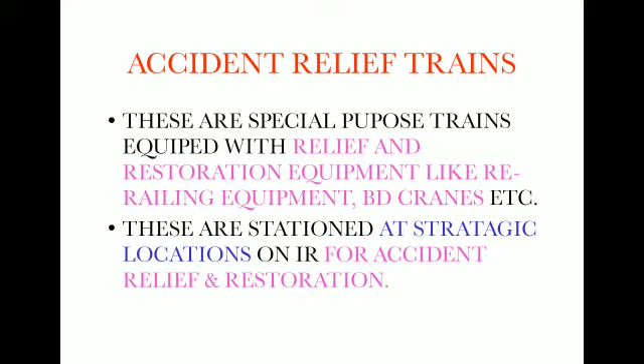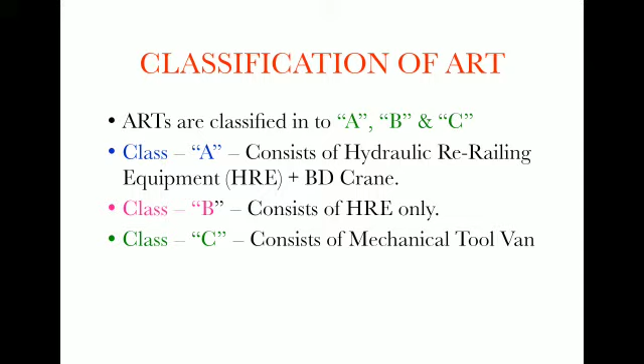Classification of ART. ARTs are classified into A, B and C. Class A consists of hydraulic re-railing equipment HRE plus BD crane. Class B consists of HRE only. Class C consists of mechanical tool van.

BG A class ARTs on SCR. Locations and type of equipment. SC: Lukas HRE plus Cowans new 140T crane. Kazipet: Lukas HRE, Cowans old 140T crane. BZA: Lukas HRE in SPART plus Cowans old 140T crane.

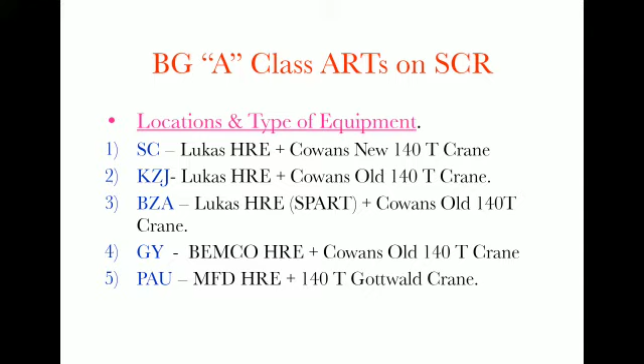GY: Bemco HRE plus Cowans old 140T crane. PAU: MFD HRE plus 140T Gottwald crane. BG B class ARTs on SCR. SC: MFD HRE in SPART. Kazipet: MFD HRE in SPART.

BPA Lukas HRE, RJY Lukas HRE, BTTR Lukas HRE, GTL Lukas HRE, RU Lukas HRE, DMM Bemco HRE, GNT Lukas HRE, NZB MFD HRE.

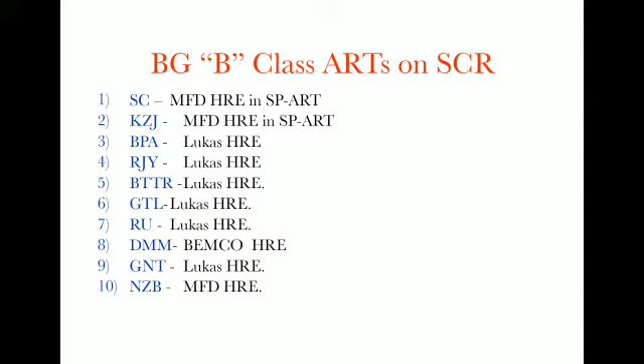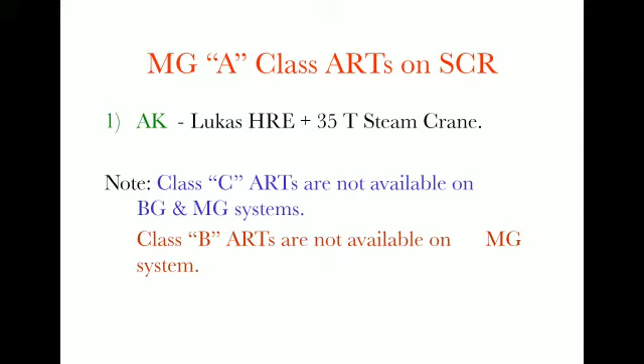MG A class ARTs on SCR. AK: Lukas HRE plus 35T steam crane. Class C ARTs are not available on BG and MG systems. Class B ARTs are not available on MG systems.

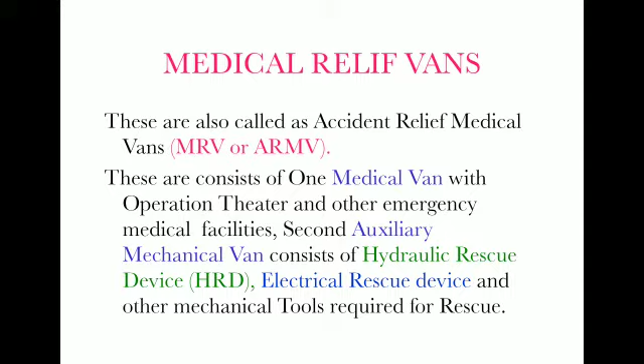Medical relief vans. These are also called accident relief medical vans, MRV or ARMV. These consist of, first, one medical van with operation theatre and other emergency medical facilities. Second, an auxiliary mechanical van consisting of hydraulic rescue device HRD, electrical rescue device and other mechanical tools required for rescue.

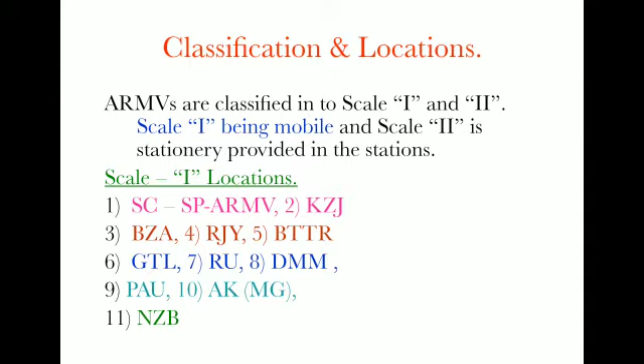Classification and locations. ARMVs are classified into Scale 1 and 2. Scale 1 being mobile and Scale 2 is stationary, provided in the stations. Scale 1 locations: SC, SP-ARMV, KZJ, BZA, RJY, BTTR, GTL, RU, DMM, PAU, AK, NZB.

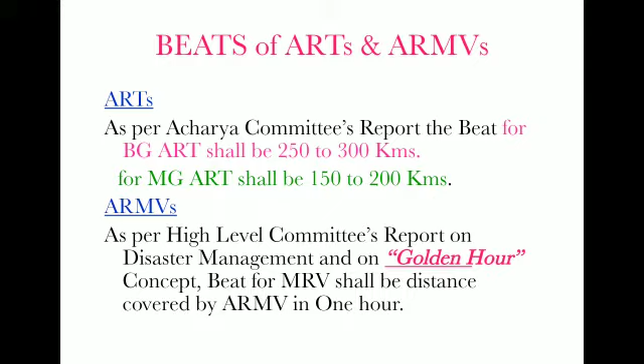Beats of ARTs and ARMVs. ARTs: as per Acharya committee's report, the beat for BG ART shall be 250 to 300 kilometers, for MG ART 150 to 200 kilometers. ARMVs: as per high level committee's report on disaster management and on golden hour concept, beat for MRV shall be distance covered by ARMV in 1 hour.

HREs. Types: Lukas, MFD, Bemco. First two are imported from Germany and Bemco is Indian make. Basic equipment and functions are the same in all types. Important items in HRE: number 1, hydraulic power pack; number 2, control stand; number 3, hydraulic jacks of different capacities; traversing unit, re-railing bridges, tilting jacks, hydraulic hoses, hand pump and other auxiliary tools.

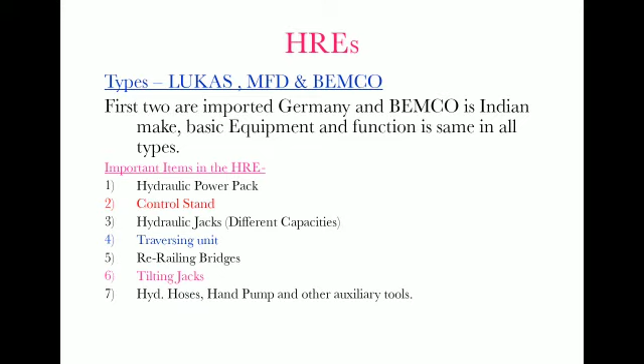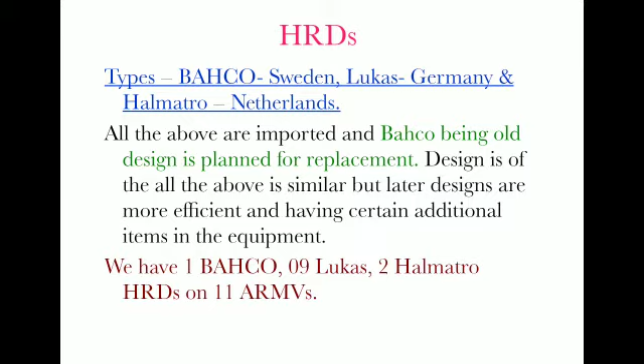HRDs types: BAHCO Sweden, Lukas Germany and Holmatro Netherlands. All the above are imported and BAHCO, being old design, is planned for replacement. Design of all the above is similar but later designs are more efficient and have certain additional items in the equipment. We have 1 BAHCO, 9 Lukas, 2 Holmatro HRDs on 11 ARMVs.

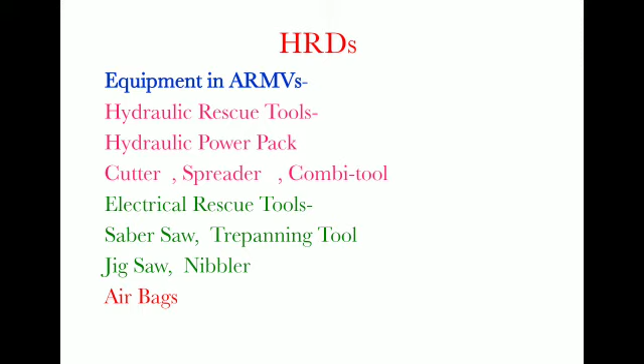HRD equipment in ARMVs: hydraulic rescue tools, hydraulic power pack, cutter, spreader, combi tool. Electrical rescue tools: saber saw, trepanning tool, jigsaw, nibbler, airbags. Types of BD cranes: 140T diesel hydraulic, 4 Cowans Sheldon old, 3 Jessop, 1 Cowans Sheldon new upgraded, 1 Gottwald; 35T steam coal-fired cranes MG, 1.

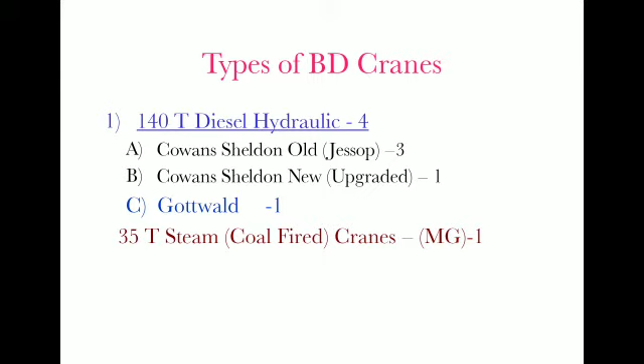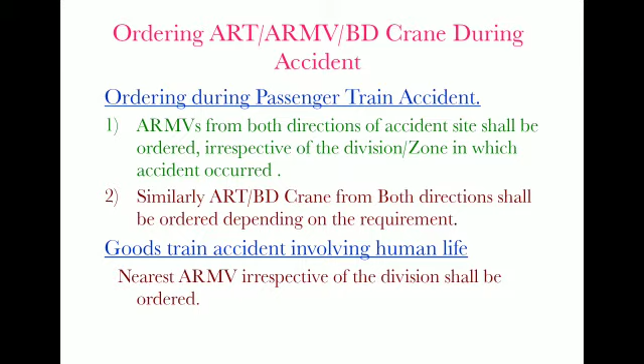Ordering ART, ARMV, BD crane during accident. Ordering during passenger train accident. Number 1: ARMVs from both directions of accident site shall be ordered, irrespective of division or zone in which accident occurred. Number 2: similarly, ART/BD crane from both directions shall be ordered depending on the requirement. Goods train accident involving human life: nearest ARMVs irrespective of division shall be ordered.

Goods train accidents continued. Accident affecting mainline running: ART from both directions shall be ordered. Depending on necessity, BD crane shall be ordered. As far as possible, ART/crane within the division shall be ordered without prejudice to ordering ARTs from other divisions and zones. Accidents not affecting through running of trains: ART/BD cranes of particular division shall be ordered.

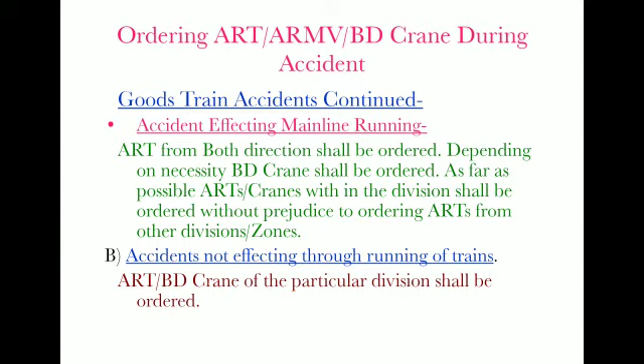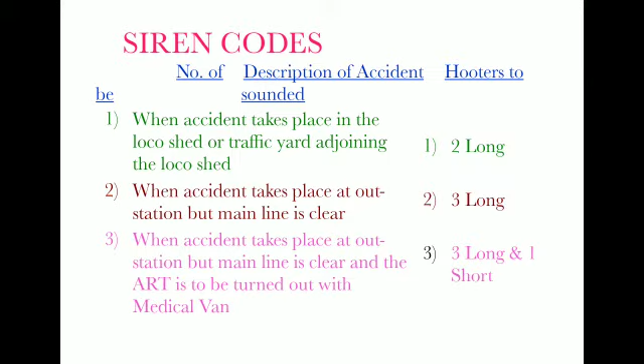Siren codes. Number 1: when accident takes place in the loco shed or traffic yard adjoining the loco shed. Two long: when accident takes place at outstation but main line is clear. Three long: when accident takes place at outstation but main line is clear, the ART is to be turned out with medical van.

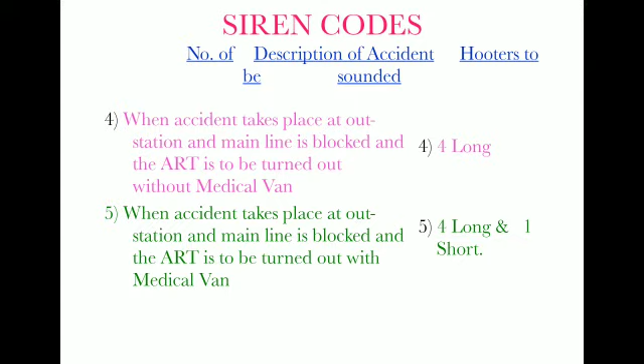Three long, one short: when accident takes place at outstation and main line is blocked and the ART is to be turned out without medical van. Four long: when accident takes place at outstation and main line is blocked and the ART is to be turned out with medical van. Four long, one short.

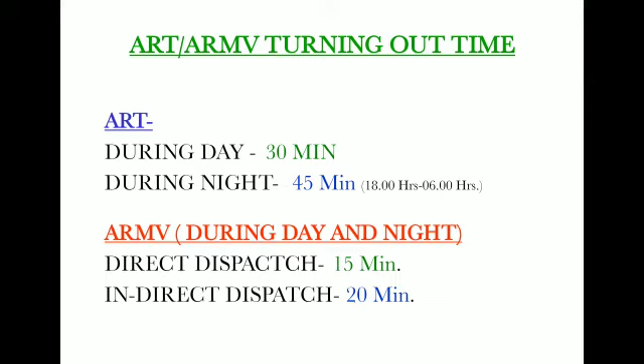ART/ARMV turning out time. ART during day 30 minutes, during night 45 minutes, that is 18 hours to 6 hours. ARMV during day and night: direct dispatch 15 minutes, indirect dispatch 20 minutes.

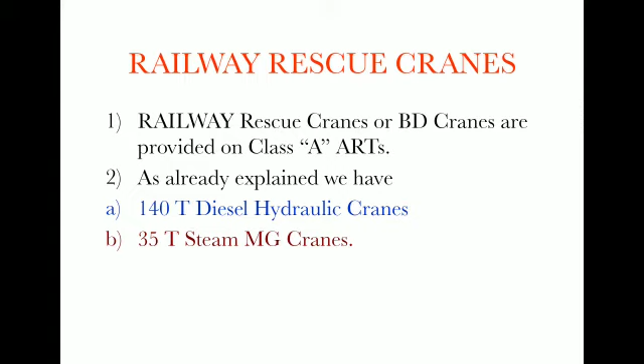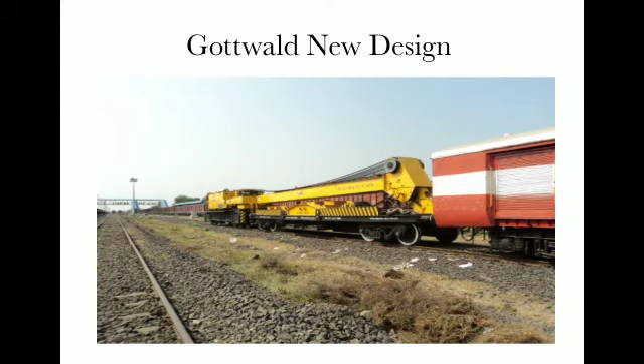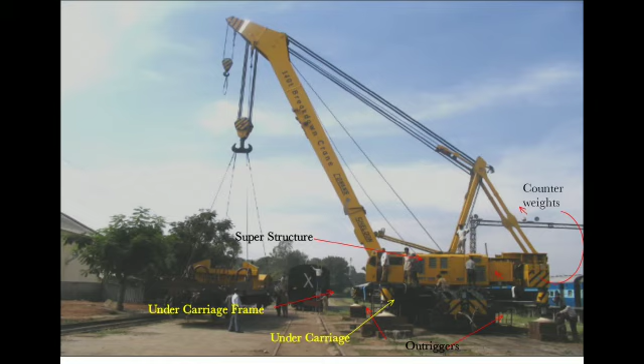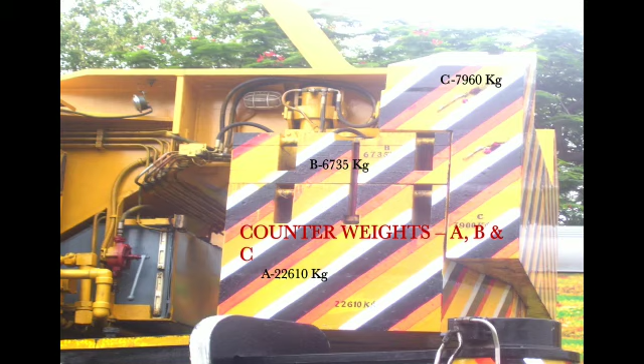This is different parts of crane: superstructure, undercarriage frame, undercarriage, counterweights. This is counterweights A, B and C. A 22,610 kgs, B 6,735 kgs, C 7,960 kgs.

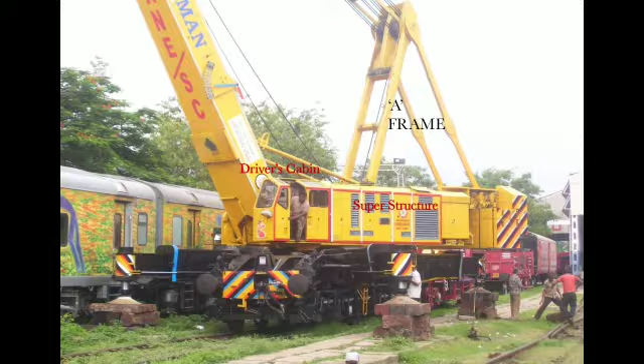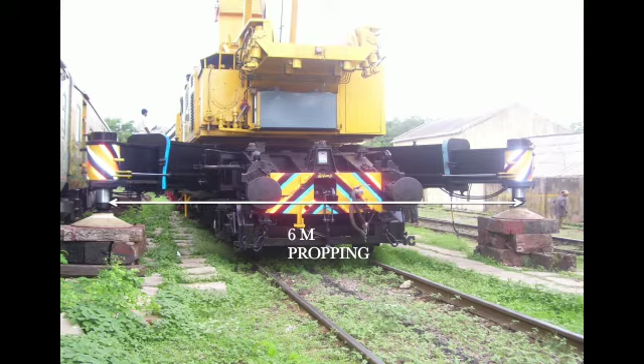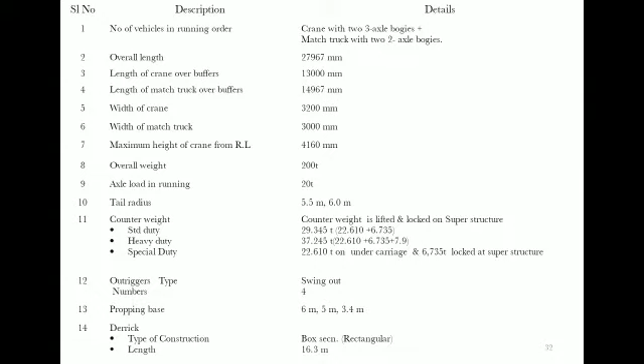Heavy duty 37.245 T, that is 22.610 plus 6.735 plus 7.9. Special duty, 22.610 T on undercarriage and 6.735 T locked at superstructure. Outriggers type swinging out, numbers 4. Propping base 6M, 5M, 3.4M. Derrick type of construction box section rectangular, length 16.3 m.

Suspension crane parabolic leaf springs, coil springs, leaf springs 6 numbers, dampers 4 numbers. Safe load indicator, Ascorel, France. Hooks, main 140T, auxiliary 25T. Hauling winch capacity 10T. Lifting beam capacity 2 numbers, 140T, 70T. Wheel diameter, crane and match truck: new one 915 mm, match truck 1000 mm; condemning crane 813 mm, match truck 906 mm.

Range of lift above rail level MH 13 m, AH 17.8 m; below rail level MH 4 m, AH 3 m. Indications available on SLI: working radius, lifted load at hook, maximum load, boom angle, boom head height, slewing angle, propping zone showing, percentage load condition, chassis gradient, super elevation, override, counterweight.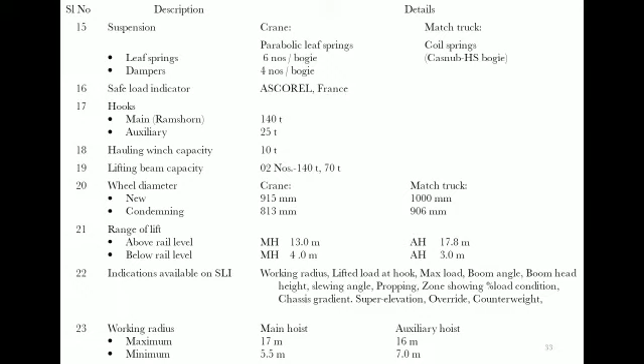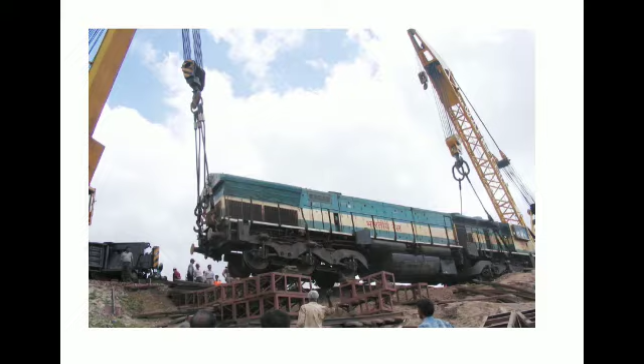Working radius maximum main hoist 17 m, auxiliary hoist 16 m, minimum 5.5 m, 7.0 auxiliary hoist. These are the images of cranes lifting loco. Old and new Gottwald cranes. Gottwald new design. Operation of 140T cranes.

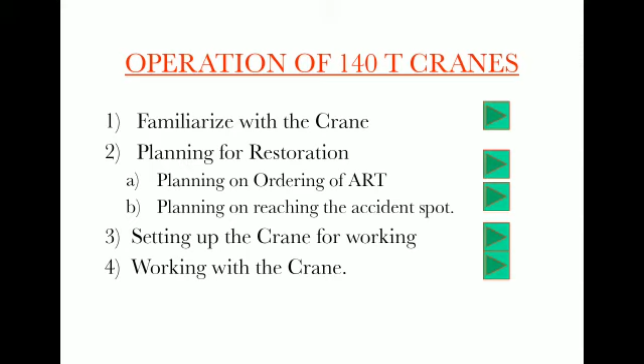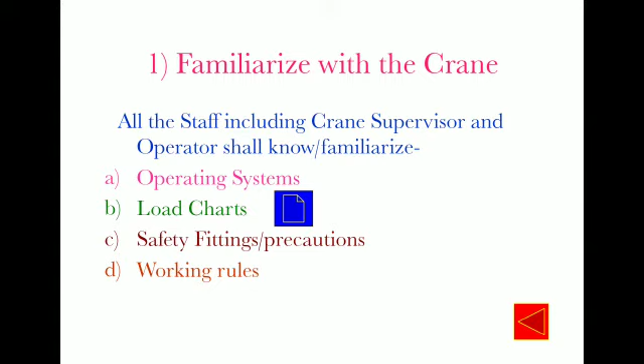Familiarize with crane. Planning for restoration. Planning on ordering of ART. Planning on reaching the accident spot. Setting up the crane for working. Familiarize with the crane: all the staff including crane supervisor and operator shall know, familiarize with operating systems, load charts, safety fittings, precautions, working rules. Planning on ordering of ART.

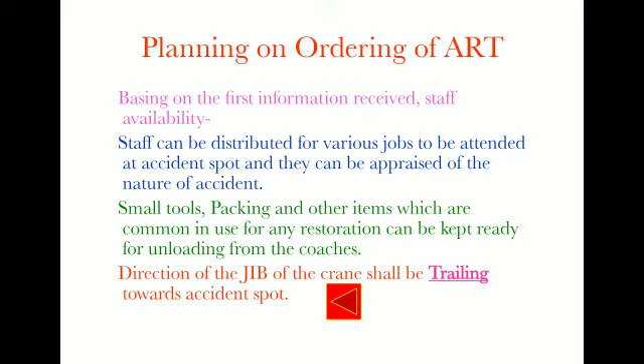Basing on the first information received and staff availability, staff can be distributed for various jobs to be attended at accident spot, and they can be apprised of the nature of accident. Small tools, packing and other items which are common in use for any restoration can be kept ready for unloading from the coaches. Direction of the jib of the crane shall be trailing towards accident spot.

Duties of senior most official travelling by train during accident. Ensure protection of traffic and assistance to guard and driver. Ensure the reporting of accident to nearest station and control. Note down the time of accident. Collect staff, volunteers, form them into different groups and assign work. Roughly assess the casualty and extent of damage.

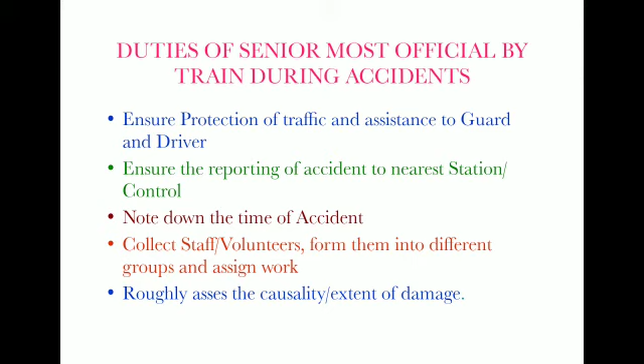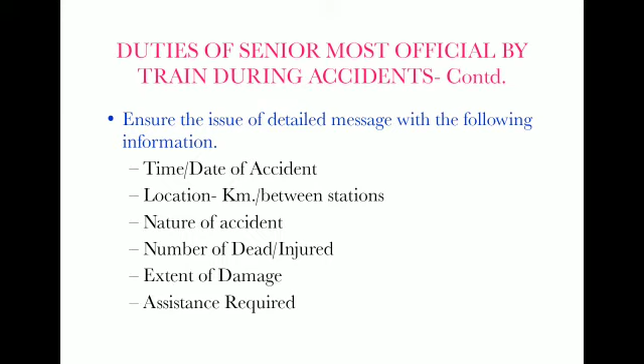Ensure the issue of detailed messages with the following information: time and date of accident, location, kilometer between stations, nature of accident, number of dead, injured, extent of damage, assistance required, primary cause of accident, condition of the adjoining line if any, whether OHE is involved. Maintain the log of events till the site manager takes over, continue to be in charge of the site.

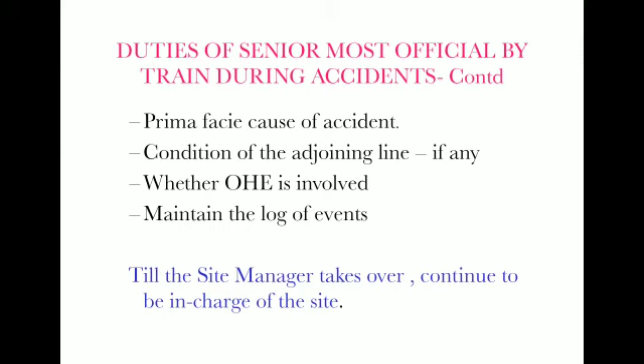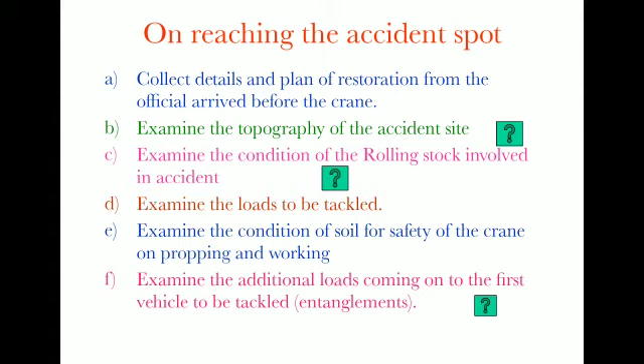On reaching the accident spot, collect the details and the plan of restoration from the official arrived before the crane. Examine the topography of the accident site. Examine the condition of the rolling stock involved in the accident. Examine the loads to be tackled. Examine the conditions of soil for safety of the crane on propping and working. Examine the additional loads coming onto the first vehicle to be tackled. Entanglements.

Examine the condition of undercarriage trolleys. Decide upon the restoration plan, that is whether to re-rail or ground. Decide upon the first vehicle to be tackled. Decide upon the slings to be used based on the loads to be tackled.

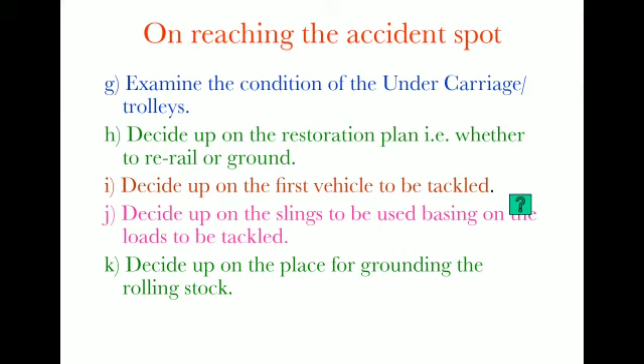Decide upon the place of grounding the rolling stock. Decide upon the correct place for propping the crane. Decide upon the slinging points on the rolling stock. Estimate the probable time of restoration, particularly from the mechanical department point. If necessary, ask for additional cranes.

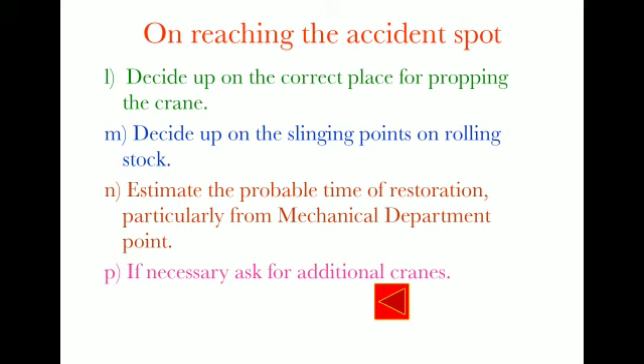Setting up the crane for working. A series of operations are required for initial setting up of the crane for actual restoration work. These are different for each type of crane. Staff nominated for this job shall know the sequence of operations. Carry out the operations which can be carried out simultaneously, thereby saving time in total restoration.

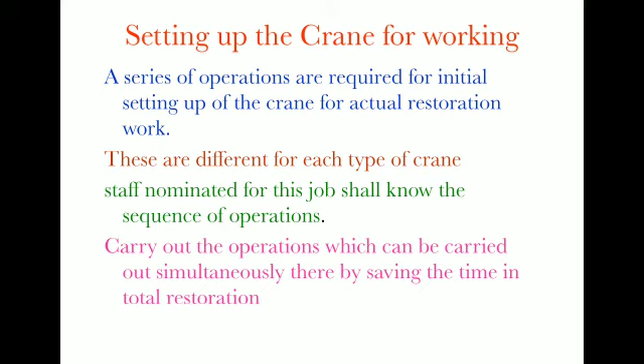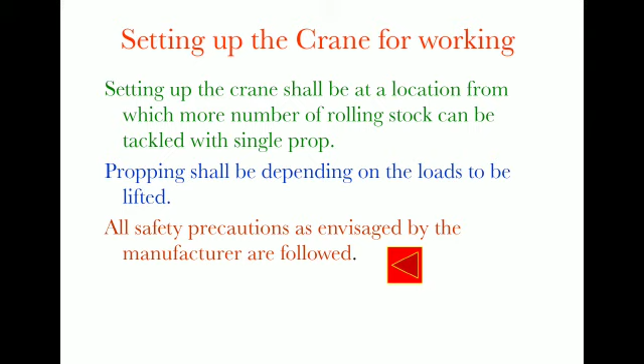Setting up the crane shall be at a location from which more rolling stock can be tackled with a single prop. Propping shall depend on the loads to be lifted. All safety precautions as instructed by the manufacturer are followed.

Working with the crane. When the crane is fully set up for tackling the load, staff nominated are in their positions, crane jib and crane slewed to the correct position. Slinging is done at the proper location depending on the condition and load of the rolling stock to be tackled. Alert all the staff of all the departments and all onlookers before actual lifting of the load.

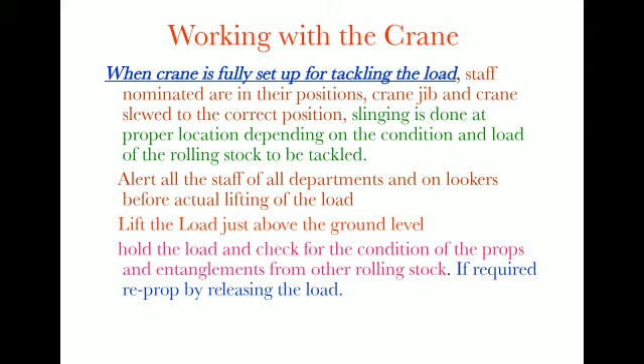Lift the load just above the ground level, hold the load and check for the condition of props and entanglements from other rolling stock. If required, re-prop by releasing the load. When lifted, also check the undercarriage condition. If required, release the trolleys.

Check the slew area is clear. Confirm adjoining running lines are blocked for train movement before slew. Lift the load to the minimum height required and slew the load to the place of grounding. Avoid jerk while slewing. Ground the load properly so that it is not fouling the running lines and shall not slip off from the ground later.

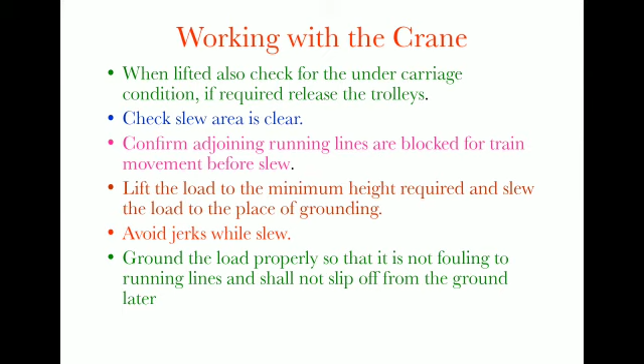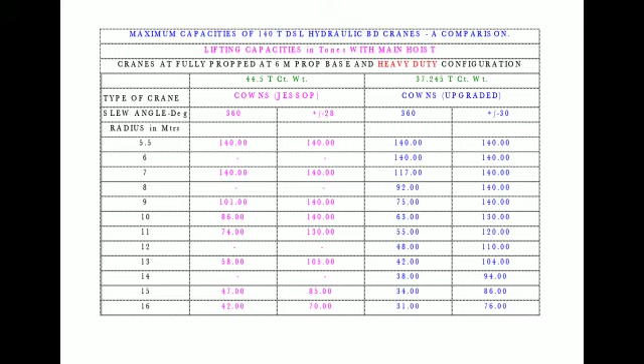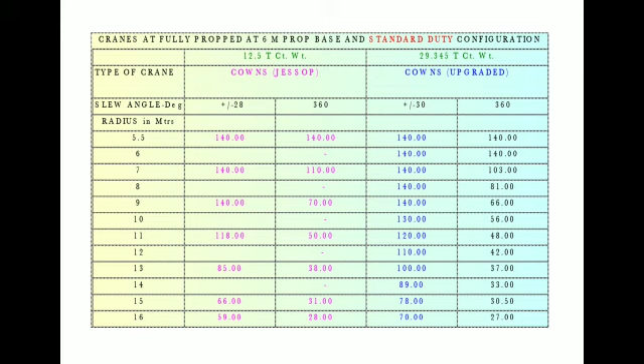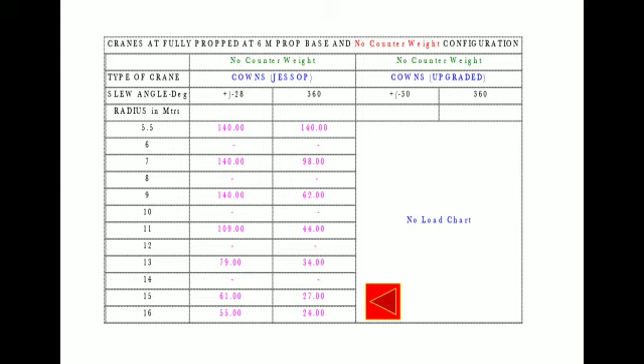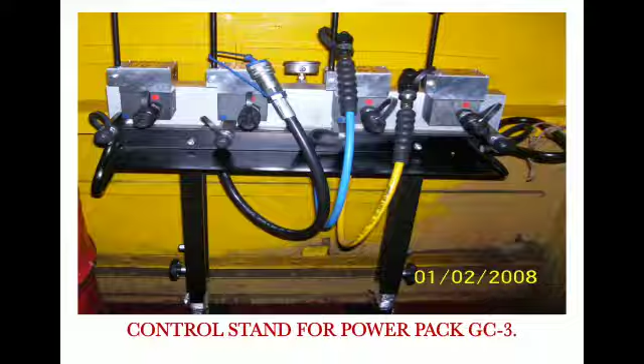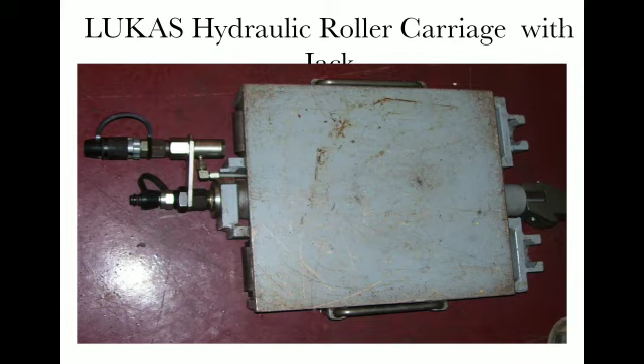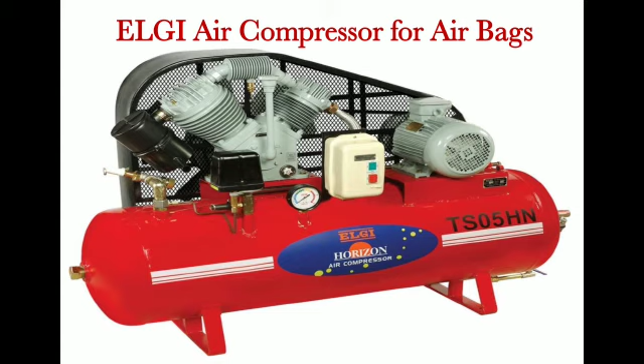This is power pack diesel, power pack petrol, control stand for power pack GC3, LUKAS hydraulic hand pump, LUKAS hydraulic jacks, LUKAS hydraulic roller carriage with jack, LUKAS hydraulic puller, inflatable airbags, air compressors and regulator and airbags, ELGI air compressor for airbags, regulator and gauges,

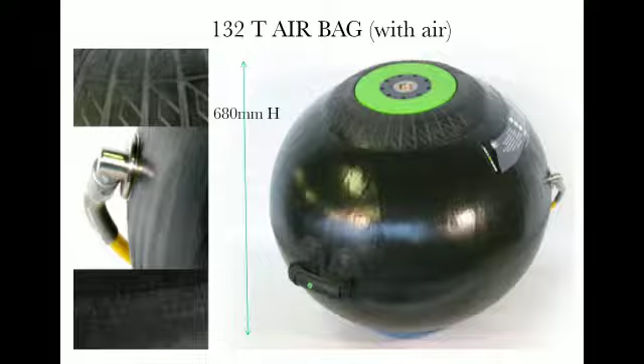132T airbag without air, 132T airbag with air, 680 mm height, 1M gas cutter with 10M hose pipe, 2M length gas cutter with hose pipe, passenger rescue device, rescue platform structure base and the canvas arrangement,

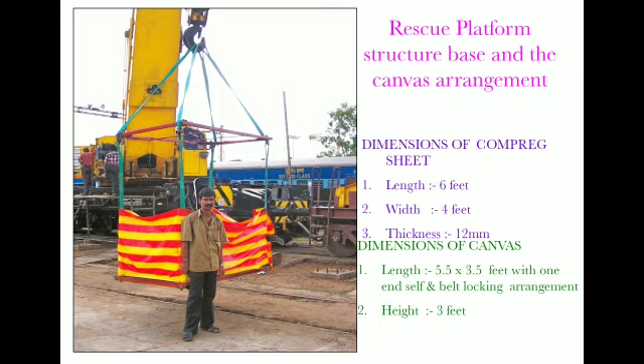dimensions of compreg sheet: length 6 feet, width 4 feet, thickness 12 mm. Dimensions of canvas: length 5.5 into 3.5 feet with one end self and belt locking arrangement, height 3 feet. This is the image of ART equipment,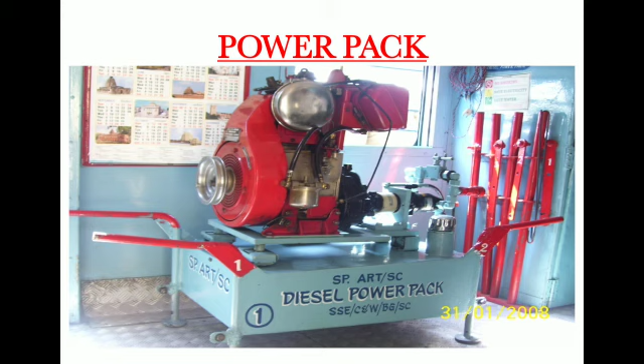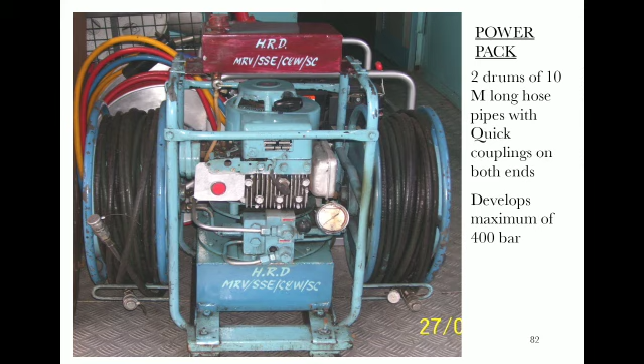self-propelled accident relief train, power pack, MFD control stand, MFD hand pump, MFD jacks, hydraulic re-railing jacks, MRV equipment, self-propelled medical relief van 100 kmph, power pack, 2 drums of 10M long hose pipe with quick coupling on both ends, develops maximum 400 bar, hand pump develops 300 bar,

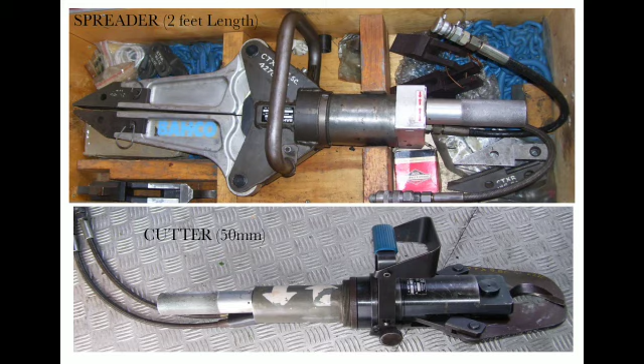spreader 2 feet length, cutter 50 mm, Lucas power pack, Lucas cutter, Lucas spreader cum cutter, spreader cutter, Lucas additional spreader, Lucas hydraulic hand pump, portable electrical generator set,

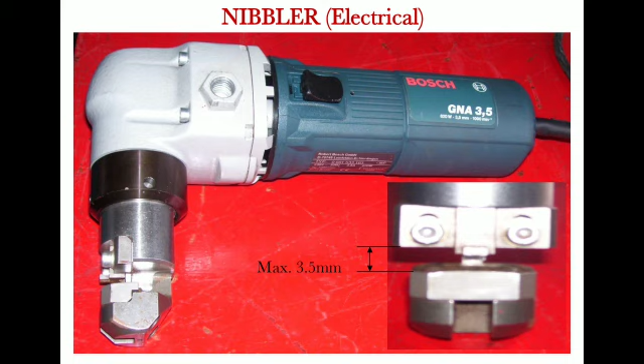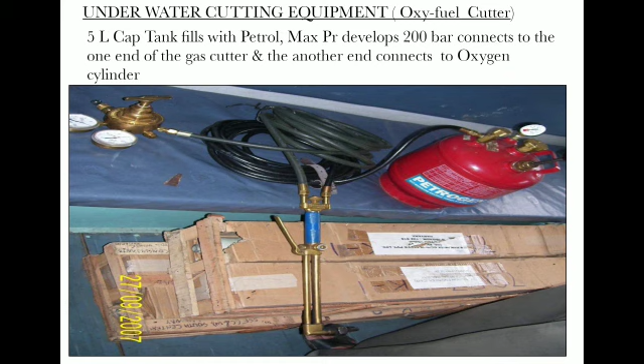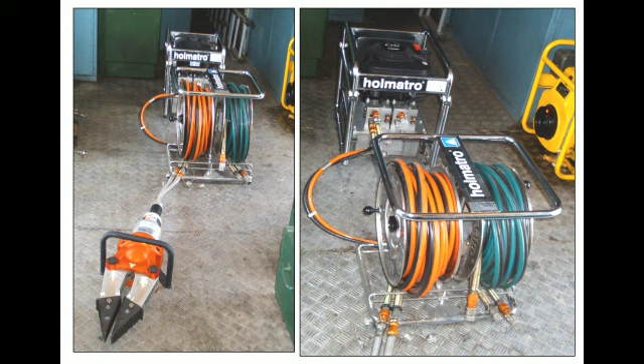underwater cutting equipment, oxy fuel cutter, 5 liter cap tank filled with petrol, maximum pressure develops 200 bar, connects to one end of the gas cutter and the other end connects to the oxygen cylinder, Holmatro HRD equipment, cutter and spreader, hose pipes, hydraulic rod cutter, hand pump, rod cutter, hydraulic rod cutter.

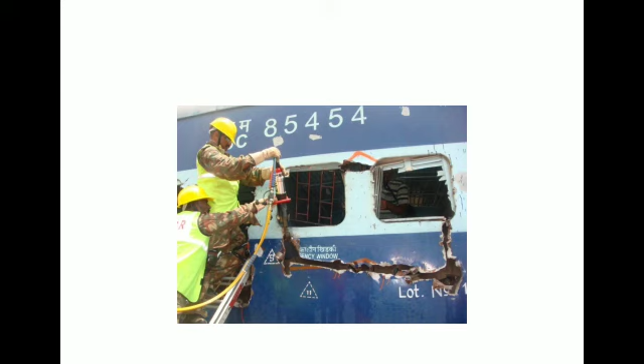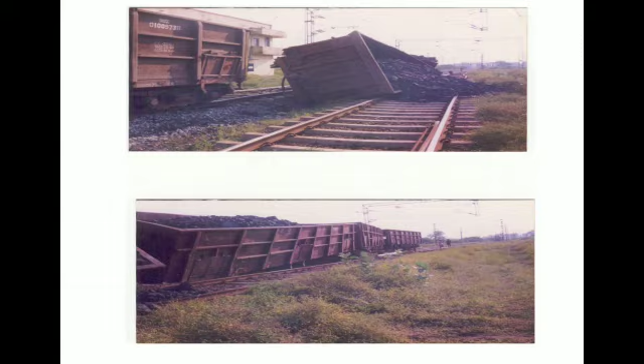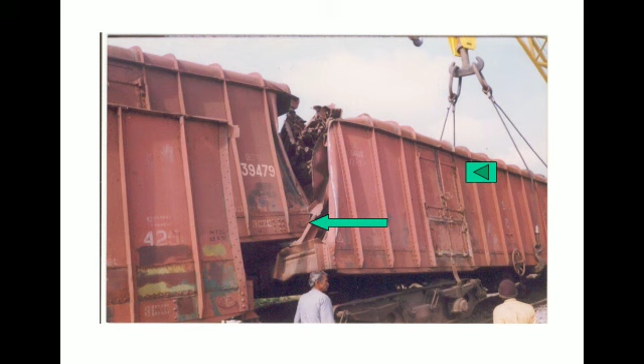These are different images showing how to cut the bogies during an accident. These are also the same images. This is the wagon derailment. These are the images of different accidents.